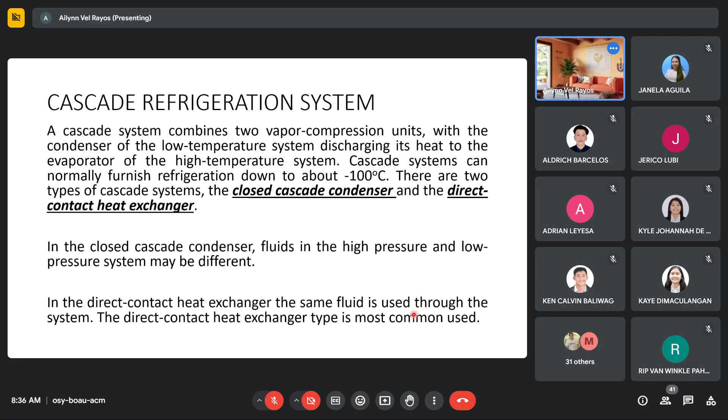Okay, so para mas madali ninyong maintindihan, meron tayo dito discussion for closed cascade condenser and syempre for direct contact heat exchanger. So let's say closed cascade condenser. So makikita nyo na merong different na flow sa low temperature system at sa ating high temperature system.

Kita ba yung cursor ko? Kita ba? Pa-confirm naman. Yes po.

Okay, so again, magkaiba yung working fluid. In most cases, sa ating closed cascade condenser, magkaiba yung working fluid for low temperature system dun sa high temperature system. So ibig sabihin, you need to check muna yung refrigerant in both low and high temperature system para alam nyo kung paano siya kukuhanin doon sa table.

Kasi baka mamaya sa isang... okay, and syempre, it has its connection with the low and high temperature. So, meaning kapag meron kayong nakuhang maling value, possible na magkaroon din ng mali dun sa ibang values. Okay, so dito naman, meron tayong derived formulas for this closed cascade condenser, but hindi ko naman ito nire-recommend na tandaan nyo.

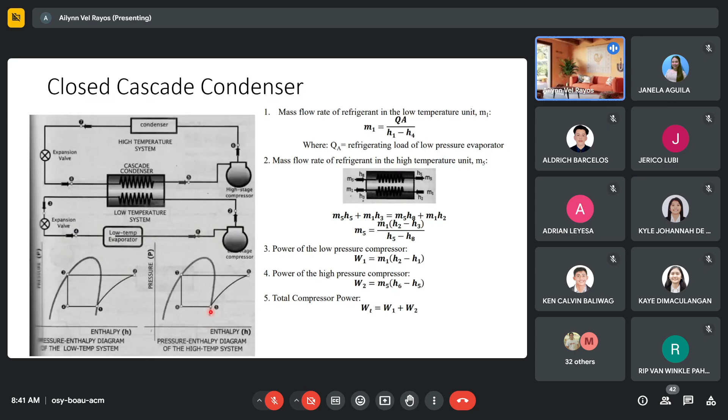A cascade refrigerating system uses refrigerant 22 in a low temperature unit and refrigerant 12 in the high temperature unit. The system develops 28 kilowatts of refrigeration at negative 40 degrees Celsius. The refrigerant 12 system operates at negative 10 degrees Celsius evaporating and 38 degrees Celsius condensing temperature. There is a 10-degree overlap of temperature in the cascade condenser. Calculate A, the mass flow rate of the refrigerant 22, B, the mass flow rate of the refrigerant 12, C, the power required by the refrigerant 22 compressor, and D, the power required by the refrigerant 12 compressor.

Okay, so again in this, meron tayong dalawang refrigerant. Low temperature unit natin, ang working fluid natin is R22, and then for high, we have R12. So the system develops 28 kilowatt refrigeration at negative 40. So alin ba yung negative 40 natin? So ito yung ating low evaporator. So yung isa naman, system operates at negative 10 degrees Celsius and 38 condensing temperature.

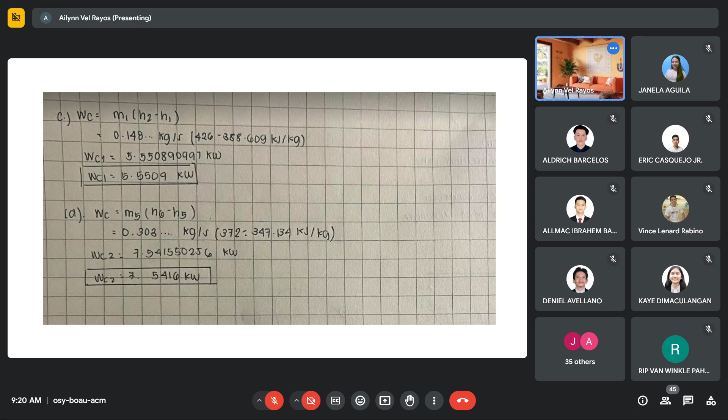So next, let's discuss this direct contact cascade condenser. So again, the main difference is that for a closed cascade system, or using a closed cascade condenser, the working fluid in the low temperature and high temperature system has no direct contact. The flows are still separate as they pass through the cascade condenser. But in this direct contact cascade condenser, there is direct contact inside the cascade condenser itself. So in this type of problem, we're only using one type of refrigerant working at low and high temperature.

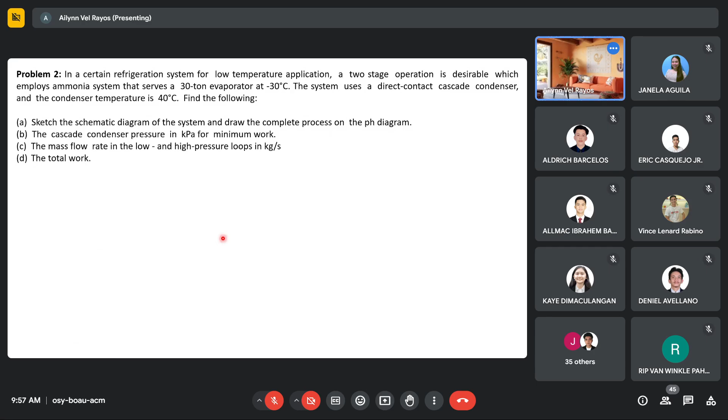So, again, be cautious of getting enthalpies, lalo na kapag sa chart kayo titingin. So, Diane, can you please discuss this problem? So, ito is lang, pero this value at 1557 kPa is HF, which is H7.

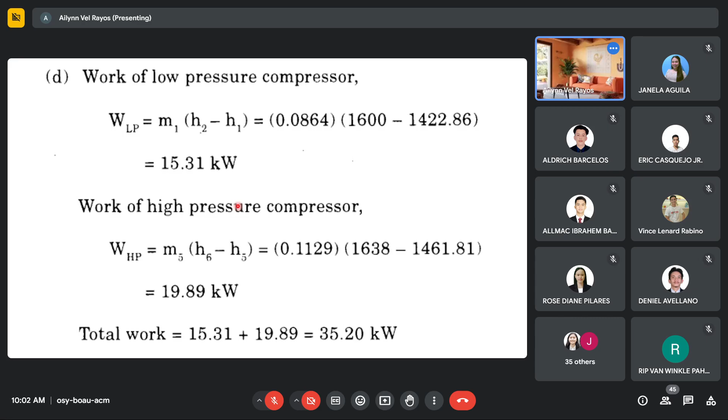Then, pag-add lang po yung dalawa, which is equal to 35.20 kilowatts. Okay, thank you. So I hope naging malinaw din itong problem na to. So ang pinakaiba lang is gumamit tayo ng intermediate pressure, and we use that intermediate pressure to get properties at state points 2, 5, 8, and 3. Kasi again, meron tayong constant pressure dito sa ating direct contact heat exchanger.